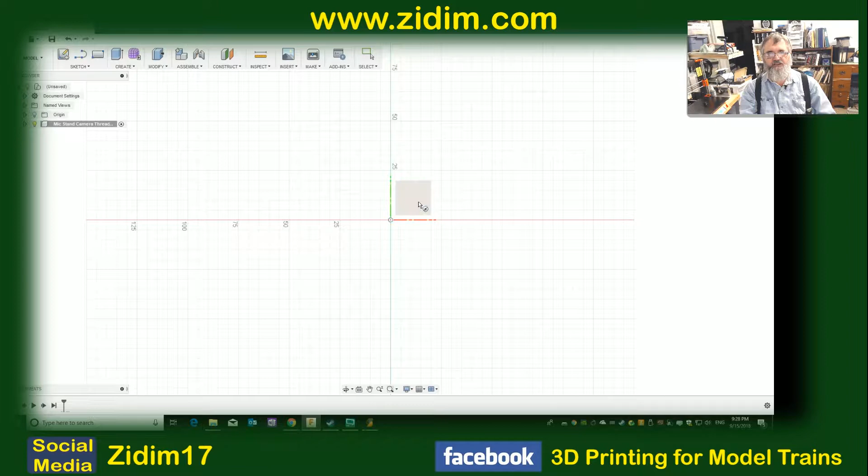For this, I don't have to create a sketch. I'm going to go to create and I'm going to make a cylinder. And on this plane, and this cylinder, I've already gone and done the measurements. It's going to be 20 millimeters on the outside. Now, and we're going to make it a total of 20 millimeters high.

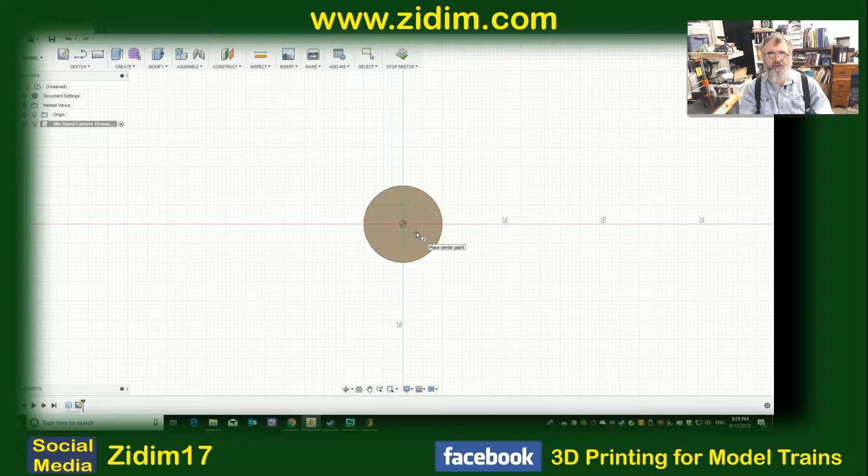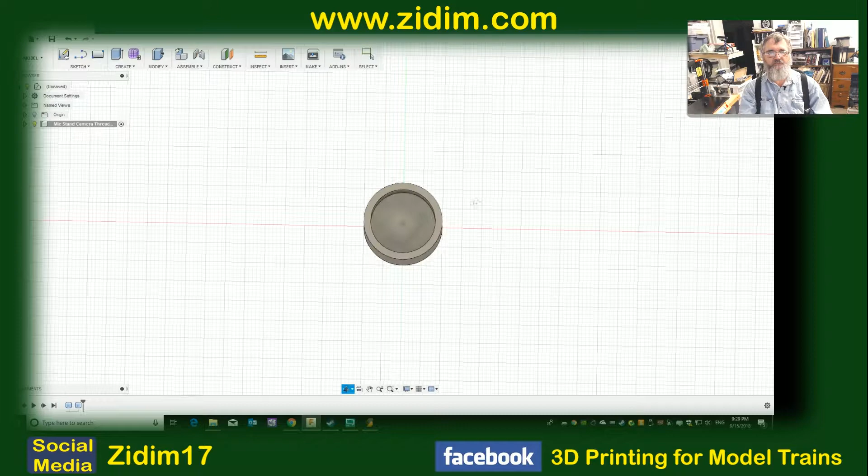So that's first. Now I'm going to make a second cylinder, and it's going to start in the same place. And once again, I've done my measurements, and this is going to be 16.5 millimeters. And its height is going to be -10. So we can do a cut. So what do we have here? We have a very simple object. Next thing we have to do is add our thread to the object.

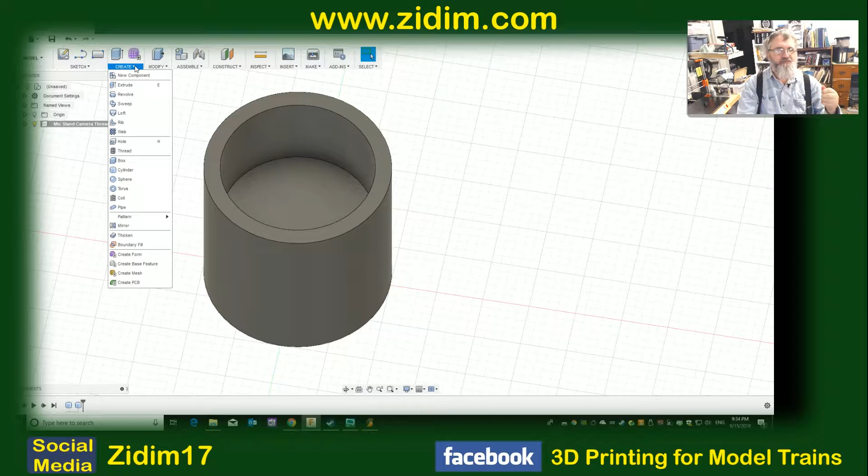So what we're going to do is go over to create again. And this is one of the wonderful things about this software. There's so many things that are done automatically, and back in the old days we had to do it in a much different format. Now we can just go down to choose thread, choose a wall to put it against. The hardest part I had about doing this was finding out what kind of thread to use, and I believe, if I'm lucky, this is unified. Yes, it is. And we're 5/8 we saw from our Google search at 27 threads per inch.

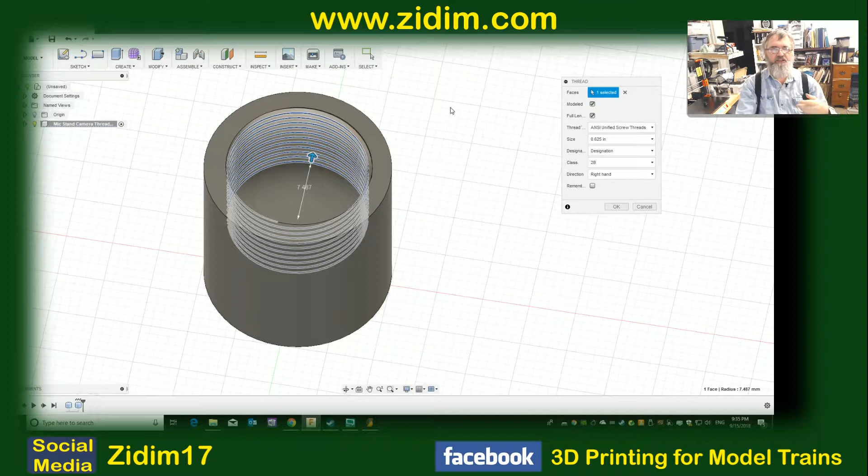Choose that. The other important thing you have to add on this is that it is modeled. So the threads will actually show on this. And we cut away. And now we have our object. So this is just a very simple version of our first try of doing this.

So if you ever go on to Maker's Muse on YouTube, Angus recently did a video talking about fails, and he normally goes through 3 steps for a project, and the first step he does is something very quick, very dirty to get out, see if the concept works. And for me, the very first thing I have to worry about is, will this actually thread on? That's the key component. As soon as I get this attached to something in the real world, I can make the rest work because I'm going to be doing it all in Fusion 360.

So what I want to do is I want to print this. So I'm going to make it. I'm going to do a 3D print. I am just doing medium here. I am not putting it out to a utility. I'm going to choose the object. There we go. And we'll give it a place to go to. And I've already actually gone ahead and saved this.

The next thing to do is to slice this. So let's go back to the screen here, and I open up Slic3r. Now, here's the object put in. Now, since this is real quick, dirty, I don't want to put a whole lot into it. Some of the things I'm going to do. Infill 0. Doesn't need it. Make sure it has no support materials in there. We're just dealing with the basics, not doing anything with the filaments. I have it here. I can slice it.

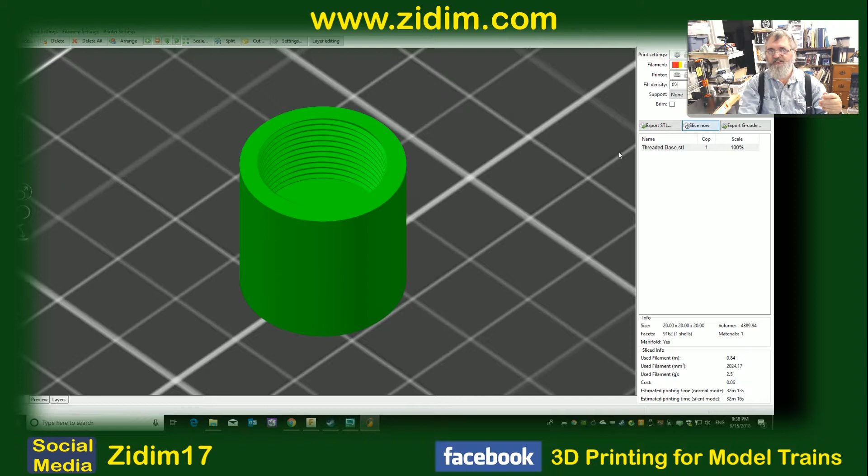Give you a quick preview. You can see the threads, and then we get into the solid section. This section here, which is empty, will actually be where our joint connects into it. So we have that. Export that. One of the things I love about Slic3r now is it gives you the name with all the information I had to put in manually before. So it gives the name, what I've set to, that it's a PLA, and it's set up for my MK3, and we're ready to go.

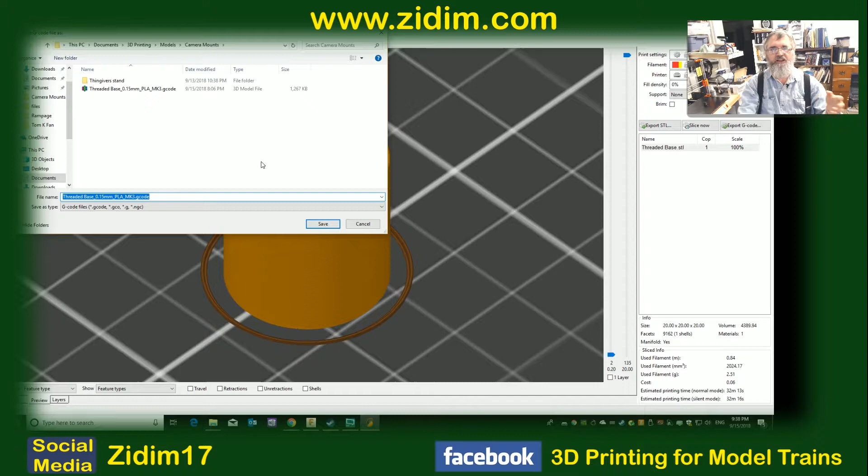So we have that, and I've actually gone ahead and printed this already. So here is the object. It's got the threads on the inside. Didn't take much. In my infinite wisdom, I printed it in black, so it'd be nice and easy to see on video. I should know better. Let's see if we'll take this on up here. And we'll go on. It threads on. I have a connection to the real world.

Now that I have this, I can connect whatever I want onto that stand, because I can now print anything else for it. So the next part, I'll go ahead and make the ball joints.